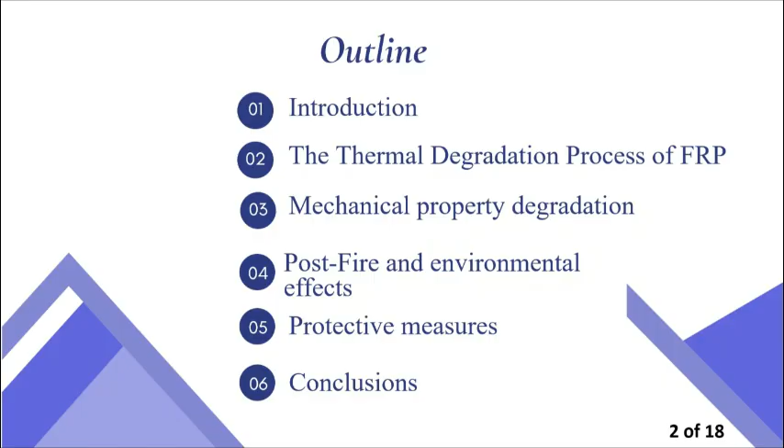So today I have the pleasure to share with you my presentation concerning post-fire residual strength and stiffness degradation in FRP-reinforced concrete structures. So this is the outline. We're going to start by the introduction. After that, we will see the thermal degradation process of FRP and mechanical property degradation. After that, we will move to the post-fire and environmental effects, protective measures, and we will finish with a conclusion.

So before starting, I'd like to quickly introduce what FRP means and what makes it special. FRP is fiber-reinforced polymer, and it combines two key ingredients. The first one is the fibers, like glass or carbon, for high strength, and the second one is the plastic, like polymer or epoxy, to hold everything together. So the fibers bear the load while the resin holds everything together and protects the fibers from damage. You can think of it like a teamwork material, as I have just mentioned.

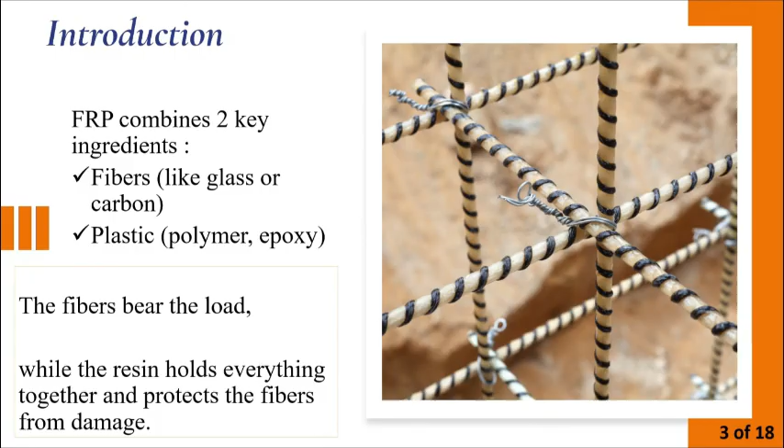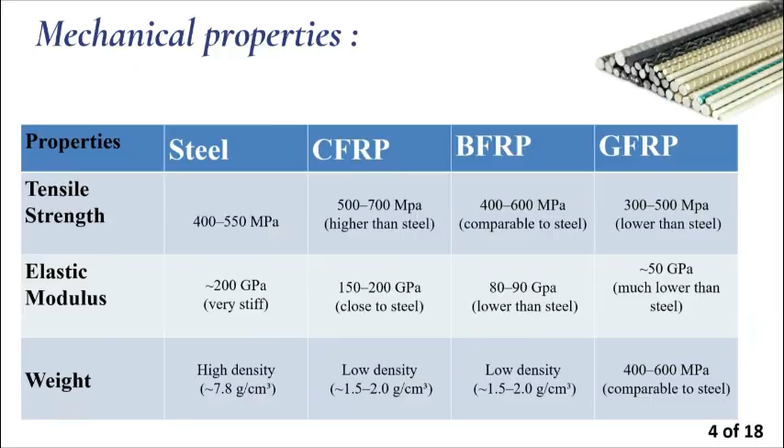So now let's move on to the mechanical properties, or what makes FRP special. It has high tensile strength, especially carbon FRP compared to traditional steel. Secondly, it has a low elastic modulus. Yes, it is strong, but it is less stiff than steel. And it is lightweight, which is one of the most significant advantages of FRP. It has low density compared to steel. Without forgetting corrosion resistance: FRP does not corrode, which improves durability, especially in harsh environments.

It has anisotropic behavior. This means that it has high strength in the direction of the fibers. So this will help engineers place FRP especially where it is needed.

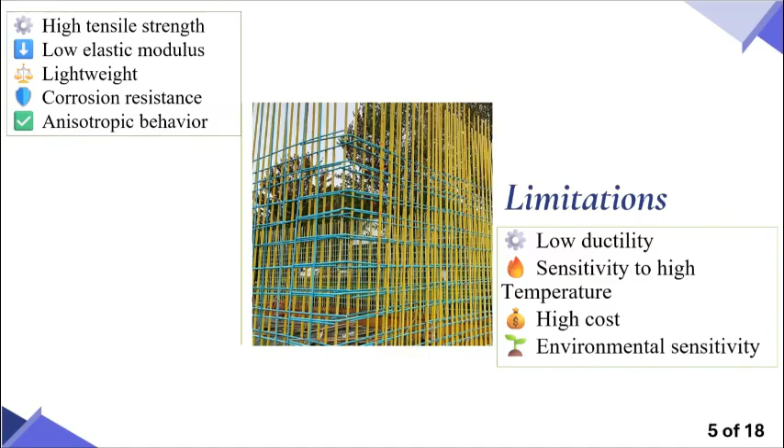And as we already know, no material is perfect. So FRP also has its limitations. First of all, it has low ductility. This means it is brittle and it can break without previous warning. Also, sensitivity to high temperature, which is actually our problem. And it has high cost, especially carbon FRP compared to traditional materials like steel. And finally, environmental sensitivity: it can be affected by humidity, UV exposure, etc.

So now let's move on to the mechanical property degradation, and I will explain how the strength of FRP decreases when exposed to fire. FRP materials are very sensitive to high temperature because the main problem starts at the glass transition temperature, called Tg, which is between 100 and 180 degrees Celsius. At this temperature, the resin inside the FRP begins to soften. When the resin softens, the bond between the fibers and the matrix becomes weak. This causes a rapid reduction in tensile strength.

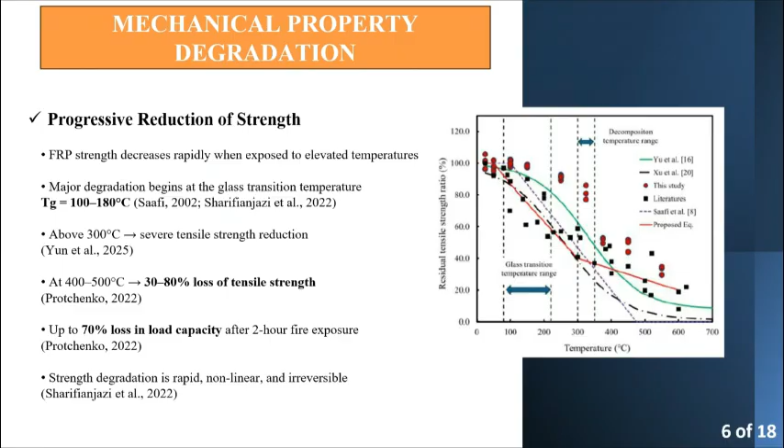Some studies also found that if the temperature rises above 300 degrees Celsius, the strength drops significantly. And at temperatures between 400 and 500 degrees Celsius, FRP can lose between 30% and 80% of its original strength, as Protchenko mentioned in their studies. It is important to understand that this strength loss is not gradual; it happens quickly after exceeding Tg, and the damage is permanent even after the structure cools down. So FRP reinforcement loses strength rapidly under fire, which can seriously affect the safety of the structure.

So now let's move on to understand how fire affects stiffness and elastic modulus in FRP-reinforced concrete. Stiffness is very important because it controls how much a structure bends or deflects under load. You already know that the elastic modulus represents the rigidity of the material, right? So when the temperature increases and reaches the glass transition temperature, between 100 and 180 degrees Celsius, the resin inside the FRP starts to soften. When this happens, the material becomes less rigid. As a result, the elastic modulus decreases and the structure becomes more flexible.

If the temperature is above 300 degrees Celsius, the reduction becomes much more serious. Research shows that stiffness can decrease by more than 50%, as Saafi mentioned in their studies. At temperatures above 400 degrees Celsius, stiffness can completely collapse, which is very dangerous. It is also important to understand that this reduction happens quickly after exceeding Tg, which we mentioned in the introduction, and it is not fully recovered after cooling.

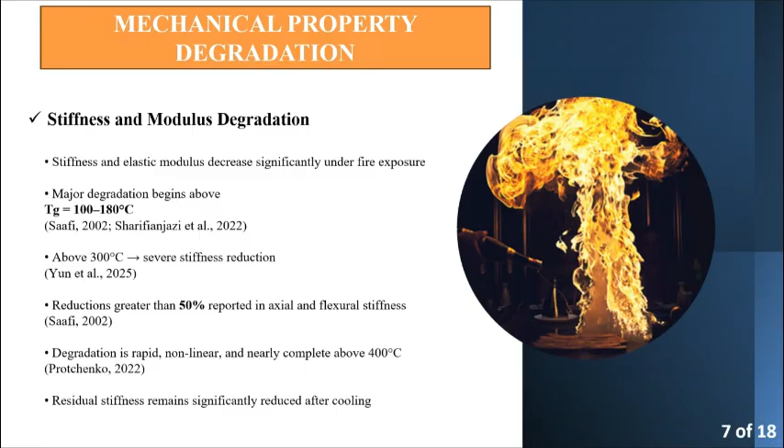So because of this stiffness loss, the structures may experience larger deflection. For sure, it will reduce the stability and raise the risk of failure or collapse. So we can conclude, based on this slide, that fire exposure significantly reduced the stiffness and rigidity of FRP reinforced members, making them more vulnerable to deformation and instability.

Bond strength degradation is one of the most critical problems under fire exposure, because in FRP reinforced concrete, the bond between FRP bars and the surrounding concrete is essential. Why? Because this bond allows the reinforcement and the concrete to work together as one composite system. However, when the temperature increases and reaches the glass transition temperature, Tg, the resin inside the FRP begins to soften. Once the resin softens, the bond between the FRP and the concrete weakens significantly. The adhesion reduces and the load transfer between the materials becomes less effective.

Research also showed that at temperatures around 150 degrees Celsius, the residual bond strength can drop to about 17% of its original value. And in some cases, the bond strength can decrease by up to 90% when the temperature exceeds Tg, as Ahmed and Kodur have shown in their studies. So very often, bond failure happens before complete material failure. That means the structure may fail because the reinforcement and concrete stop working together, even if the fibers are not completely damaged.

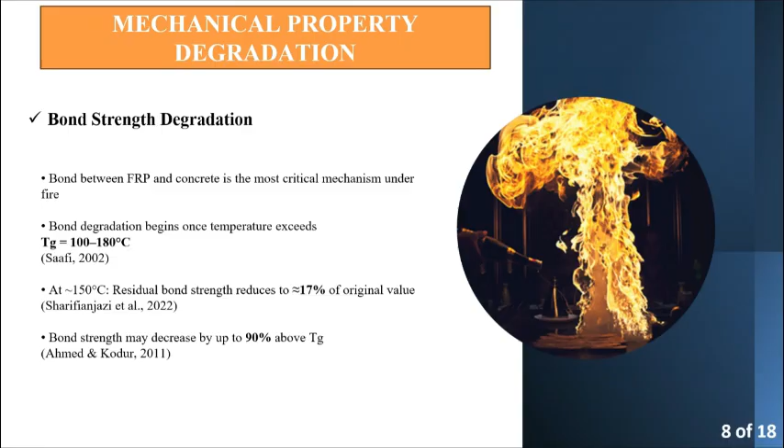And now for the post-fire and environmental effects. So now we will talk about what happens after the fire is over, and actually, this is the core of our presentation. Even when the fire stops and the structure cools down, the damage remains. The FRP bars do not recover their original strength. After fire exposure, the tensile strength becomes much lower and the stiffness is also reduced. This means that the structure cannot carry the same load as before.

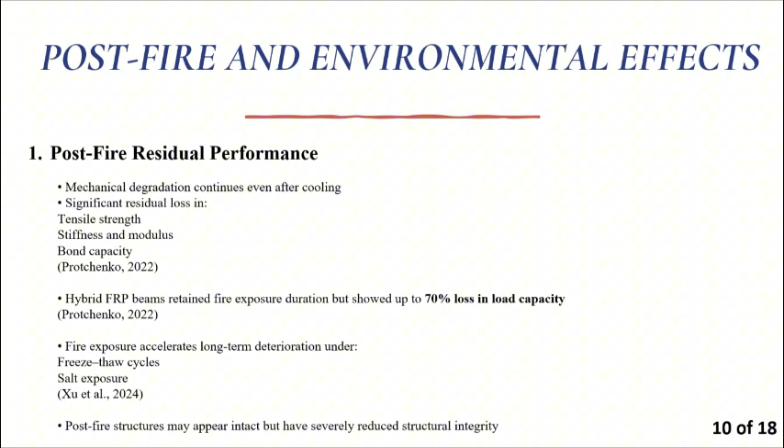In some fire tests, beams lost up to 70% of their load capacity after just 2 hours of fire, even though they did not collapse during the fire. Another important problem is the bond between FRP and concrete. After fire, this bond becomes weak, as we just mentioned in the previous slide. So even though they did not collapse during the fire, it will not work. Sometimes the structure may look fine from the outside, but inside the reinforcement has already been seriously damaged. So even if the structure survives the fire, its residual strength and safety level may be greatly reduced.

Now I will discuss the compressive behavior and confinement of FRP reinforced concrete under fire exposure. FRP is often used to confine concrete columns. This confinement increases compressive strength and improves ductility under normal temperature. However, under fire exposure, this benefit is significantly reduced. When the temperature rises and exceeds the glass transition temperature, the resin inside the FRP softens. As a result, the confinement effects become weaker. This leads to a reduction in compressive strength and elastic modulus of the concrete.

And the concrete can no longer resist axial loads as effectively as before, because fire exposure increased slippage between FRP and concrete. So instead of improving performance, the FRP confinement loses its effectiveness at high temperature. Fire exposure significantly reduced the compressive capacity and confinement efficiency of FRP reinforced concrete, leading to lower strength, lower ductility, and higher risk of brittle failure.

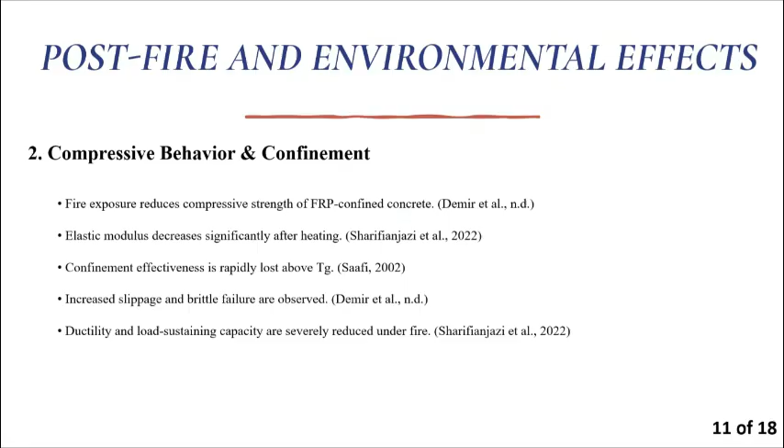Now we will move to protective measures, starting with concrete cover, as a kind of solution. One of the main ways to protect FRP reinforcement from fire is by increasing the concrete cover. The concrete acts as a thermal barrier between the fire and the FRP bars. When the concrete cover is thicker, it slows down the heat transfer to the reinforcement, which delays the temperature rise in the FRP bars and postpones reaching the critical glass transition temperature.

Research also shows that increasing the concrete cover can significantly improve the fire resistance time. For example, a concrete cover of just about 70 millimeters can allow a beam to resist fire up to 90 minutes, which is very important. However, it is also important to understand that the concrete cover does not completely prevent damage; it only delays the heating process. If the fire lasts long enough, the temperature will still reach the FRP reinforcement and degradation will occur.

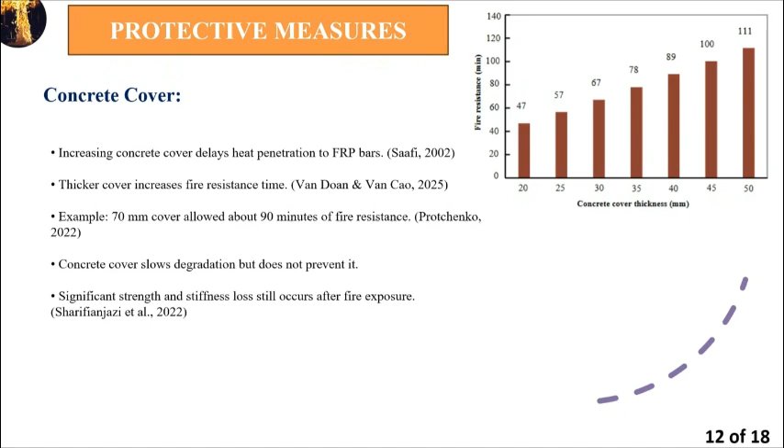So the most important point you should get is that increasing concrete cover is an effective and simple protective measure. It improves fire endurance time, but it cannot fully stop strength and stiffness degradation during prolonged fire exposure. We have also another solution.

So about insulation systems, also a protective measure against fire. In addition to increasing concrete cover, external insulation measures can be used to protect FRP reinforced members from high temperatures. Let me explain more. This insulation system acts as an additional thermal barrier; they reduce the rate of heat transfer from the fire to the structural elements. Common types of insulation include, as you can see on the screen, ceramic fiber blankets, calcium silicate board, etc. Actually, there are many.

When exposed to fire, some of these materials expand or create a protective layer that slows down the heat penetration. Researchers proved that insulated FRP-strengthened beams perform much better during fire exposure. In some cases, beams protected with insulation experience only about 20% loss in flexural strength after 2 hours of fire. This is a significant improvement compared to unprotected members.

However, it is also important to understand that insulation systems delay the temperature rise, like the concrete cover, but they do not completely eliminate thermal damage. If the fire lasts long enough, degradation of the FRP will still occur.

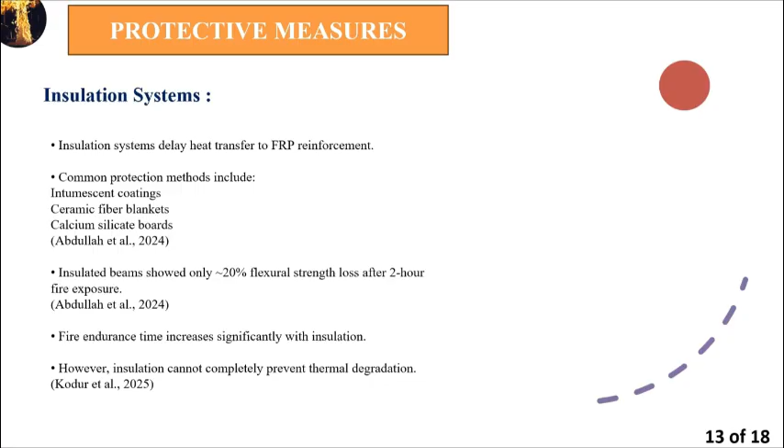So now let's discuss the hybrid reinforcement system as another protective strategy against fire. Hybrid systems combine FRP reinforcement with traditional steel reinforcement in the same member section. The idea behind this approach is to benefit from both materials, the steel and the FRP. FRP provides corrosion resistance and high tensile strength, while the steel offers better performance at high temperature.

So during fire exposure, the steel reinforcement can maintain its strength longer than FRP. This helps the structure continue carrying the loads even when the FRP begins to degrade. So we will have some kind of improvement. Researchers also show that hybrid beams generally perform better in fire conditions compared to beams reinforced only with FRP. They have improved fire resistance times and better residual capacity after cooling.

However, it is also important to note that strength and stiffness degradation still occur. If the fire duration is long or the load level is high, the structural performance will still decrease significantly. The final point is that hybrid reinforcement systems improve fire performance compared to pure FRP systems, but they do not completely eliminate the problem of thermal degradation.

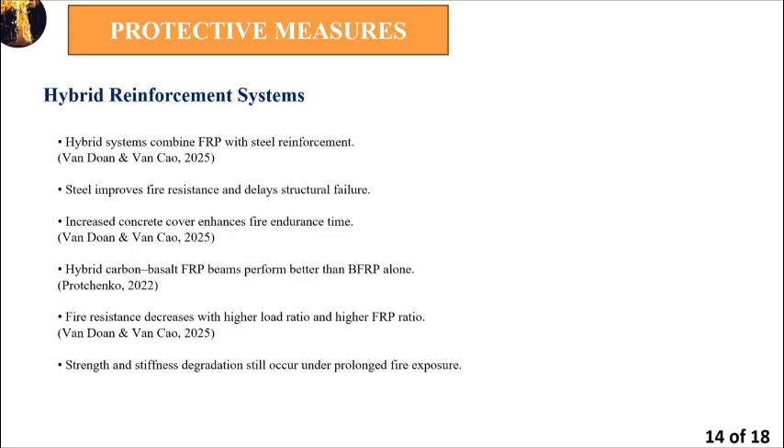So now let's move on to the gaps. Even though many studies have been done on FRP under fire, based on my research I found that there are still some important gaps. First, we still do not have accurate models to predict the long-term strength of FRP structures after a fire. Most research focuses only on short-term results. Second, the resin used in FRP is very sensitive to heat, so we need to develop better fire-resistant resin materials.

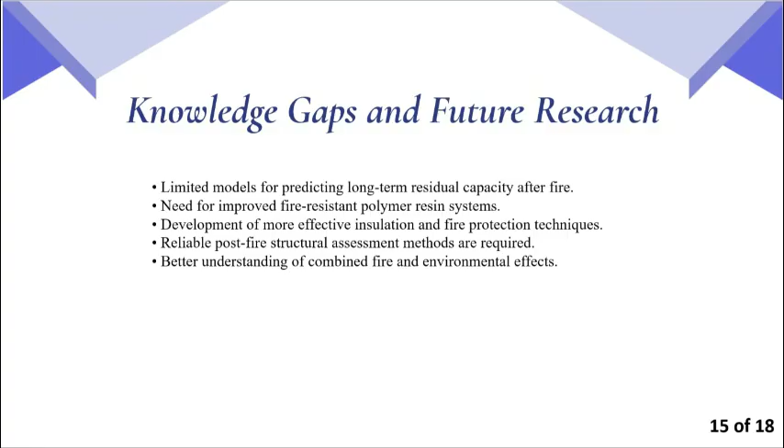The third point is that insulation systems help, but they are not perfect, so more effective and affordable fire protection methods are still needed. And finally, engineers need clear guidelines to assess FRP structures after a fire and decide whether they can be repaired or must be replaced. There are two choices; one of them must be decided. So future research should focus on improving materials, protection systems, and post-fire evaluation methods.

So to conclude, just to give you an overview of what we have discussed: FRP reinforcement offers many advantages under normal conditions, such as high strength, low weight, and excellent resistance to corrosion. However, its performance under fire exposure is a major concern. When the temperature reaches the glass transition temperature, the resin begins to soften. This leads to a rapid reduction in tensile strength, stiffness, and bond capacity, which we have just explained.

Protective measures such as increasing concrete cover, using insulation systems, and applying hybrid reinforcement can improve fire resistance. However, these solutions only delay the damage; they do not completely prevent it. Therefore, when using FRP reinforcement in structures where fire risk exists, proper fire protection design and post-fire assessment are essential. In summary, while FRP is an excellent material under normal conditions, its vulnerability to high temperature must be carefully considered in future structural design.